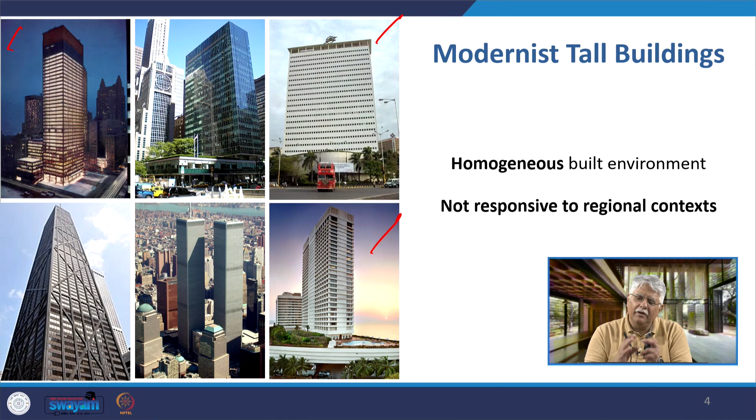The modernist tall building is a homogeneous built environment, not responsive to regional context. If we look at the Seagram building in New York, the Air India building by Johnson Burgee in Mumbai, or even the Trident Hotel, we find that they are just cuboidal masses varying from America to India only because we didn't use glass due to our climate - we used RCC while they used steel and glass.

But basically these buildings are very similar to each other and not responsive to regional contexts. So this picture really clarifies the issue. If you joined my earlier presentation on modern Indian architecture, you will recollect some of these slides, because I will be recapitulating India's paramount contribution to critical regionalism. So our focus in CR is more on India than any other country.

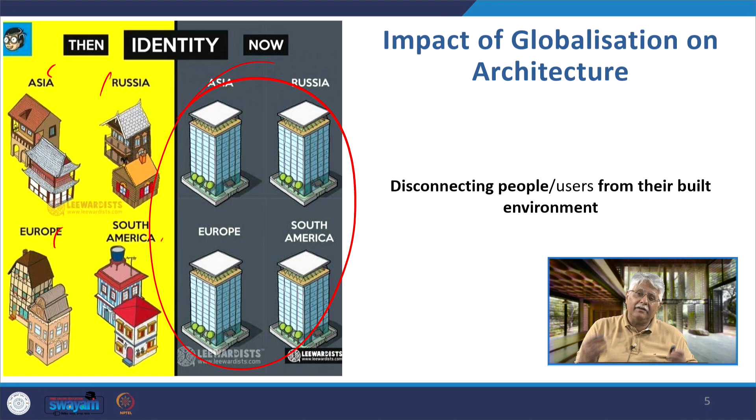Here in this slide, earlier when we talked about houses or buildings in Asia, Russia, Europe, South America, each one had a different flavor. But now that identity has been lost all over the world. We have created the same kind of buildings, disconnecting people and users from their local regional built environment.

So identical have cities become - the regional flavor, the regional taste is gone. In late modern tall buildings, not just modern tall buildings, they all speak the same language and continue the rootless global identity. In postmodernism, with all their playfulness, ornamentation and historical context, there is impulsive individualism - and this ornamentation of postmodernism also gets rejected.

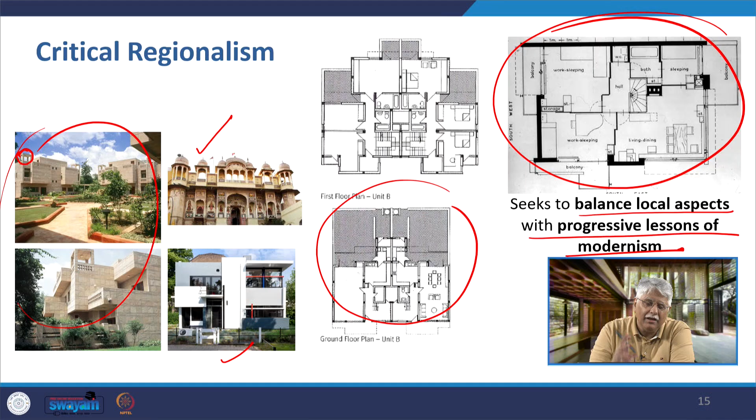So it is critical regionalism - taking a universal civilization and mediating that with the elements of a particular place. Its aim is to counter the homogeneity of modernist architecture, as you see here, this homogeneity in all these houses.

The reasons why India became the place with likely the most works of critical regionalism are its enormous climate and cultural diversity - from the Himalayas to deserts to coastal regions, and the variety of vernacular traditions across the regions of India, there are so many. Also, the post-colonial search for identity by architects like Charles Correa, B.V. Doshi, etc., who sought a modern identity for India, for the Indian ethos.

The resource constraints and climate necessity also played a role, because we needed to build passively, as we did not have enough resources, we were not economically strong, and our building technology was not that fine, so we needed to rely on making buildings climatically responsive. Passive design, local materials, and adaptive reuse were necessary for economic and climatic reasons, and the continued practice across generations also helped - generation after generation, architects have carried on the critical regionalism model, from masters like Charles Correa, B.V. Doshi onwards.

From Doshi and Raj Rewal to contemporary architects like Bijoy Jain, Sameep Padora, Sanjay Puri, Morphogenesis, etc.

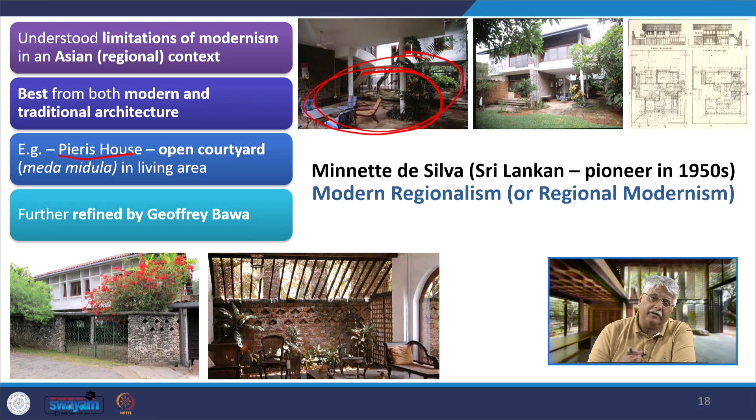Though Minnette de Silva coined the term modern regionalism or regional modernism, it was further refined by another Sri Lankan architect, Geoffrey Bawa. In his work we find tropical modernism, akin to regional modernism. Whether it was the parliament building he designed or other buildings, he brought in this concept of tropical modernism.

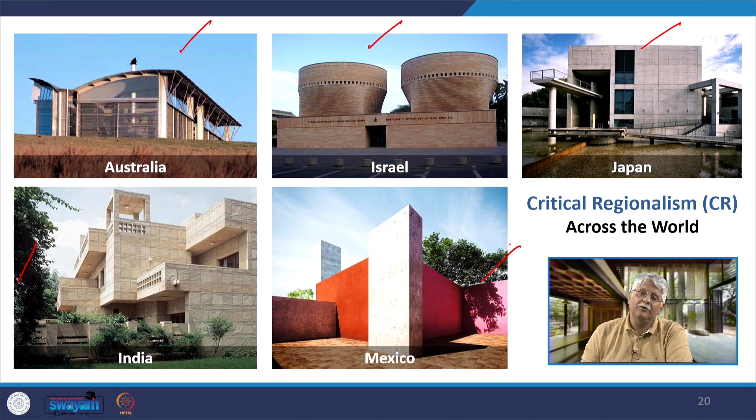Critical regionalism then spread all over the world, because everyone wants to follow what Kenneth Frampton said: to mediate the universal civilization with elements of that particular region. Thus we have Glenn Murcutt in Australia, architects in Israel, architects in Japan, architects like Raj Rewal in India, and architects like Luis Barragán in Mexico.

Critical regionalism or regional modernism, please bear with me for some time until I clarify this. Even before Indian architects were aware of this term, they were still subconsciously pursuing the idea in their building design.

For example, in the India International Center by Joseph Allen Stein, which I have studied in detail in my series Modern Indian Architecture, so I won't go there. But whether it was siting of buildings, light and shade, use of local materials, construction process, climate responsive features, or traditional elements used in a modern context, all this we find in IIC and in other buildings.

Not only them, we can go even further back. Similar ideas we see in the work of Edwin Lutyens, who gave us New Delhi along with Herbert Baker, and even Lutyens was conscious of orientation, shading and natural cooling. In fact, every architect of any bearing who came to India understood one thing: you cannot build against the climate, you have to build with the climate, and they did that.

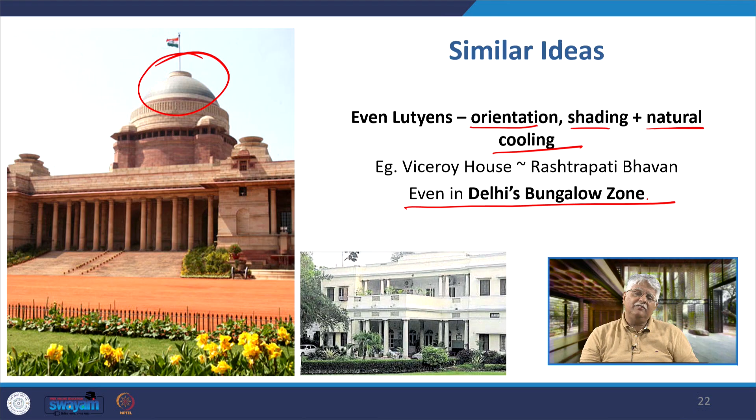So even if the building is colonial, it is still being modified to suit the climate of India, and other features have also been taken. For example, the Sanchi Stupa is clearly evident in the dome of the Rashtrapati Bhavan, and also in the use of climate responsive features in Delhi's bungalow zone.

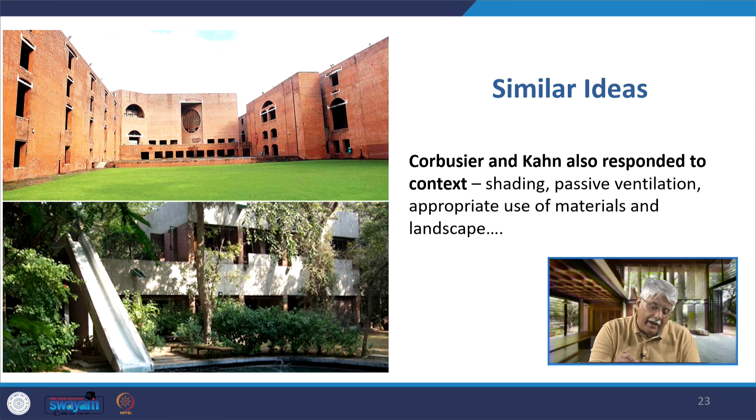Similar ideas we also find in the works of Corbusier and Kahn, who also responded to the context and brought in shading, passive ventilation, appropriate use of materials and landscape, whether in IIM Ahmedabad or the Sarabhai house in Ahmedabad.

But the generation that followed, or even worked with them, brought in a truly modern regional architectural language. These were architects like B.V. Doshi, Charles Correa, Rahul Mehrotra, Bimal Patel, etc. Thus critical regionalism took its roots in India, like in the Sangath by B.V. Doshi, or the new campus of IIM Ahmedabad by Bimal Patel.

Now, coming back to that point I said I would discuss: the difference between critical regionalism and regional modernism. They do overlap, there's no doubt about it, and often somebody might just say critical regional modernism. What is the difference? Critical regionalism is deeper, a more thoughtful evolution of regional modernism. CR doesn't just adapt to modernism, but questions it, rooting it in the place, the culture and the experience. So it is a much more thoughtful, much more worked out regionalism.

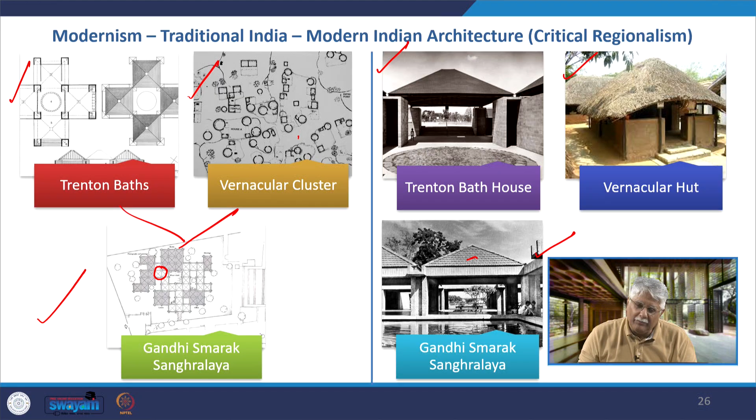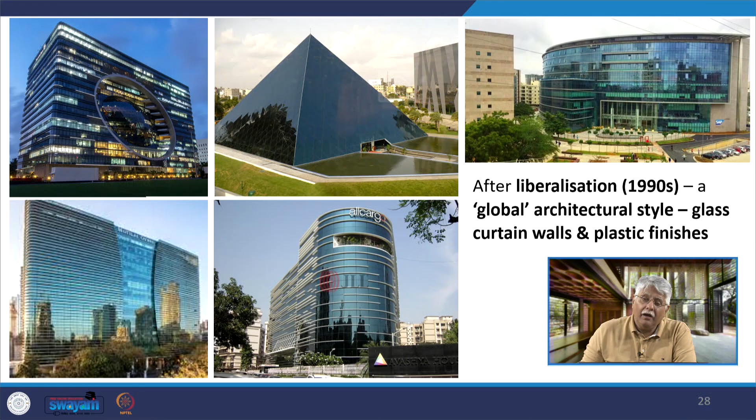The influence of critical regionalism varied with political, economic and social changes. For example, after India's liberalization in the 1990s, a global architectural style of glass curtain walls and plastic finishes became dominant. You see, when you look at Gurugram for example, you see all glass and steel in this fast evolving city, particularly after the 1990s.

But though this uniformity came in because of liberalization, because glass and steel came in abundantly in India, new technologies came in faster because our economy really leapfrogged forward, it did not take away the inclination of architects working under CR. These architects were even more greatly inclined to make critical regional buildings.

Reliance on technology to light and air condition our buildings and cars to reach them is the modern life. Very high energy consumption corresponding to very high carbon emissions, creating an unpleasant urban environment with great disparity between the haves and the have-nots. Therefore, the aim to be sophisticated and modern is actually being rejected by the West.

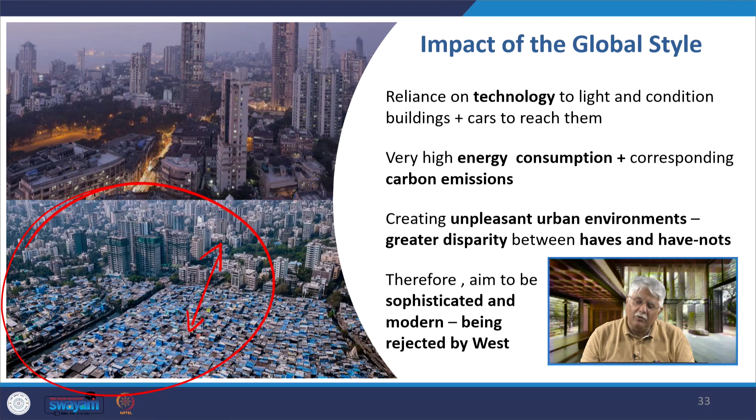This is what our city is. Look at this city, this is the picture of Mumbai, and look at the difference between the haves and the have-nots. Look at the disparity, or look at even today's cities with the high amount of pollution, the high amount of carbon emission. Thus the answer lies in critical regionalism, a different approach from the homogeneous or global architecture by relating architecture to the place.

How does it then deal with the problem of carbon emissions? I will come to that in a little while.

Let's look at a few other things like placelessness versus context. Placelessness of the modern architecture versus the context that arises because of critical regional architecture, a sense of place and meaning, sensitive to local climate and technological constraints of the local building industry in critical regionalism.

He has not simply made the Haveli again. He has taken the essence of the Haveli, the essence of the architecture, the Chhatris for example, and then brought that essence into this housing.

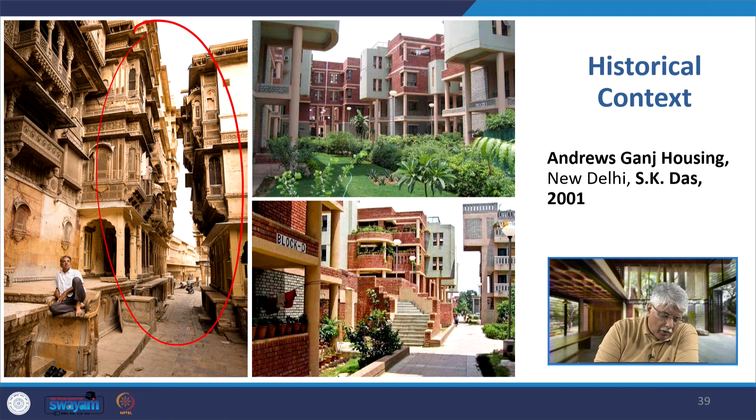The historical context you find in Andrews Ganj housing by S.K. Das, 2001, where, just as we find in our older traditional towns this kind of mutual shading impact over the streets because of cantilevers, we find the same approach taken in this housing.

Or even in this housing by Charles Correa, he takes this mutual shading effect of Jaisalmer and brings that into the Tara group housing in Delhi. So comes the dictum coined by Charles Correa, that is true for India: rather than the modernist 'form follows function', the dictum becomes 'form follows climate'.

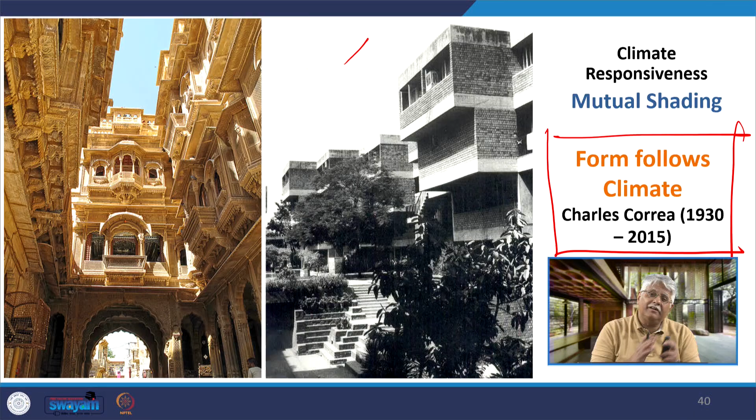The reason for climate responsive architecture today: earlier there was a problem of lack of technology, unaffordability of centrally conditioned buildings. We were constrained to design as per climate because we couldn't afford air conditioning.

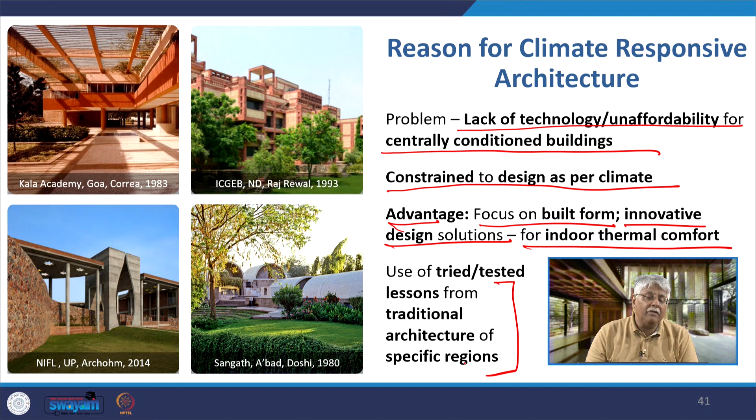The advantage was that architects were focused on the built form. They wanted to have innovative design solutions so as to provide indoor thermal comfort through passive means by using the climate in favor of the building. The use of tried and tested lessons from traditional or vernacular architecture of a region came into use at that time.

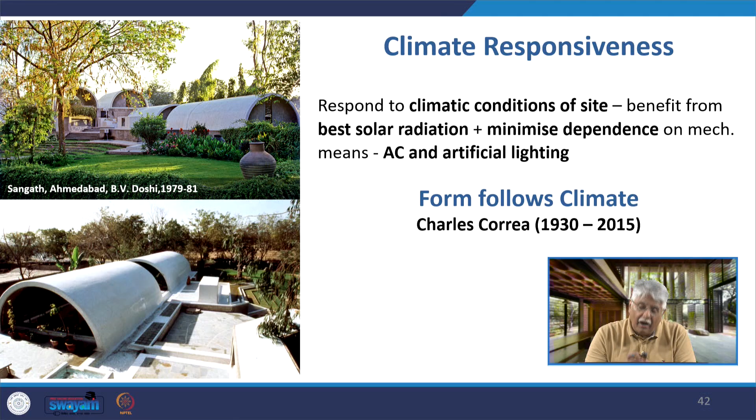Thus, we responded to the climatic conditions of the site, how to benefit from the solar radiation, how to minimize dependence on mechanical means like air conditioning and artificial lighting. In the Sangath building for example, the studios made by the architect have been sunk in, they are subterranean, and there are external walls which are one meter thick, hollowed out so that you can make storage niches from the inside.

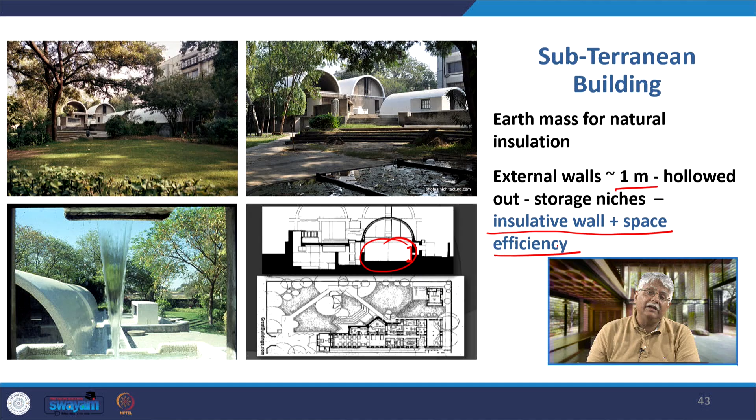They are not only insulative but also lead to space efficiency. Now, how to reduce the internal heat gain through the vaults: what they have done is taken these cylindrical terracotta tiles, cut them in half, and used the cylindrical tiles placed between two layers of ferrocement shells like this.

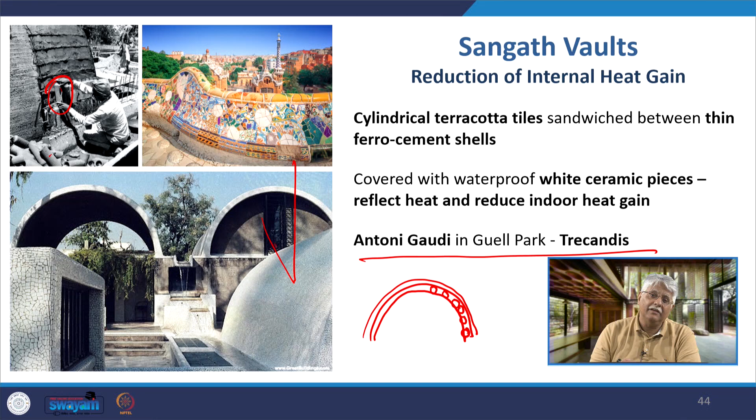They have put these cylindrical terracotta tiles like this, and covered them with white ceramic pieces or mosaic. As a result, this white ceramic tile reflects the heat back. Whatever solar radiation enters, because of the hollow terracotta tiles, an air gap is created, and that heat gain is also avoided, thus indoor thermal comfort increases and heat gain is much less. This whole idea of using mosaic tiles comes from Trecandis, the idea of Antoni Gaudi.

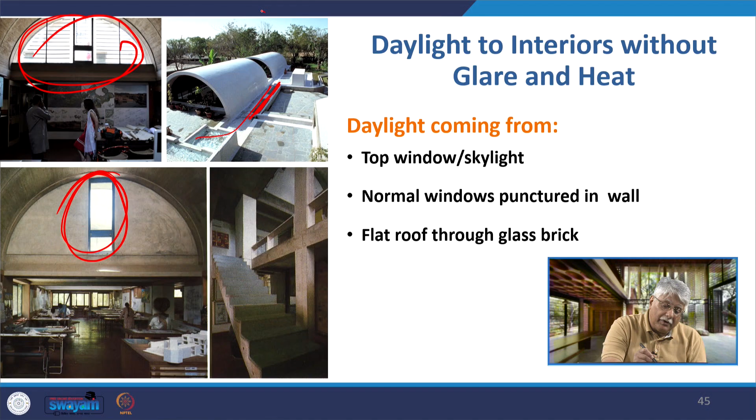Daylighting also comes inside the building to avoid artificial lighting. It comes from the top window, the skylight, and from the normal windows punched in the wall. And here you see these glass bricks over which water flows, but which also allow light to come down into the spaces below.

But the reason we want climate responsive architecture today is different. Earlier it was because we were economically weak, air conditioning was not an option, so we had to use passive strategies to cool our buildings and increase thermal comfort. But today, since the economy got liberalized post-1990s, we have the resources, we can condition our buildings, we have the materials, but there is a serious global problem of carbon emissions. 38% of global carbon emissions happen from buildings, out of which 28% is in operating the building.

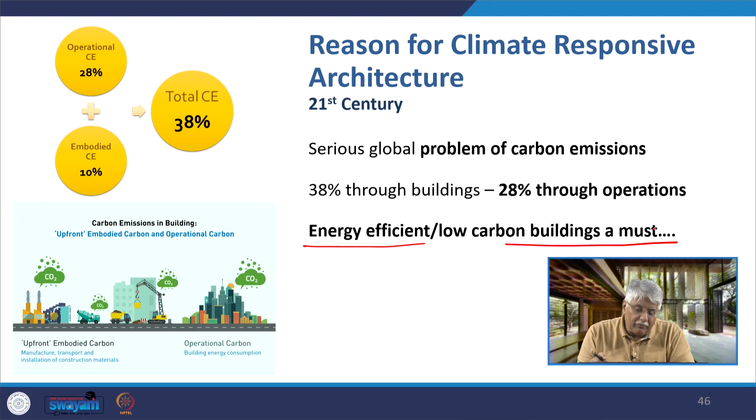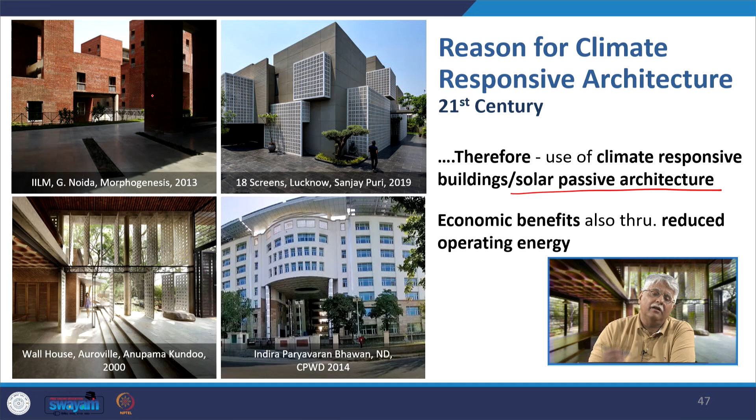Therefore it is very imperative to make energy efficient, low carbon buildings, and one way is to make our buildings in the same model as the past: climate responsive, passive, green, sustainable buildings. That we do when we use critical regionalism - that is one of the ways to do that. Climate responsive buildings and solar passive architecture are needed, and we also get economic benefits, because when we save operating energy, we save money. So in all these projects, critical regionalism is the way to go.

Now, the design of energy efficient and green buildings today can be highly engineered, hermetically sealed to achieve high energy efficiency with no impact from external climate. It is possible to design an energy efficient building this way, but the use of climate responsive solar passive techniques is also done by many architects, both earlier and today. The third method is a hybrid, where both advanced techniques and solar passive means are applied together.

So in the Cisco building in Bangalore, we see the first type: a very highly engineered, hermetically sealed, energy efficient building. The second type, critical regionalism, we see in the house by Shirish Beri. And the third type, a mix of the two with both technology and passive means, we find in the IGBC building by Karan Grover in Hyderabad.

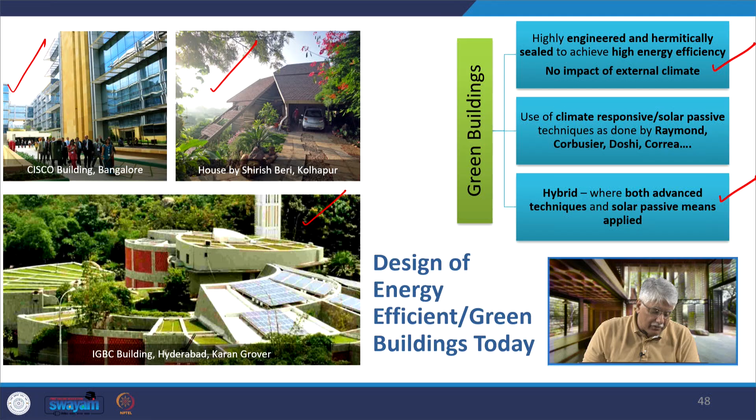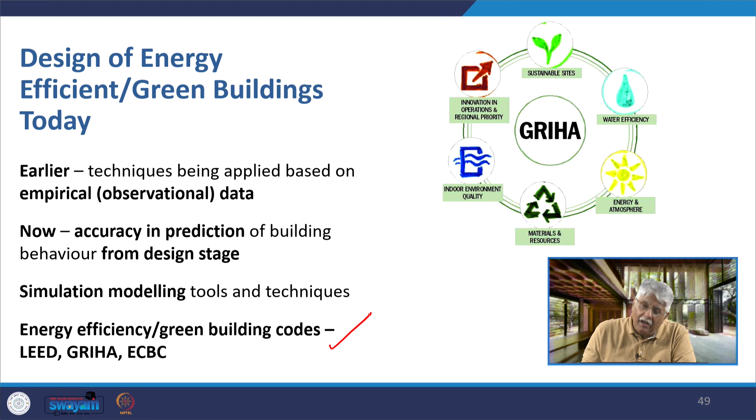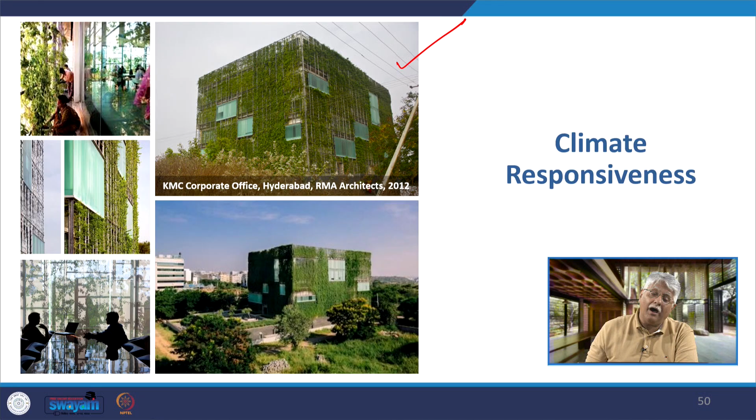Earlier techniques were applied based on empirical or observational data, but now we can design energy efficient buildings based on accurate prediction right from the design stage. We can simulate and model buildings using available tools and techniques to make them energy efficient, with reference to codes like GRIHA, LEED or ECBC. So today we can make a building like the KMC Corporate Office in Hyderabad by RMA Architects, Rahul Mehrotra Associates, climate responsive, which has a green wall, or we can use local materials in construction.

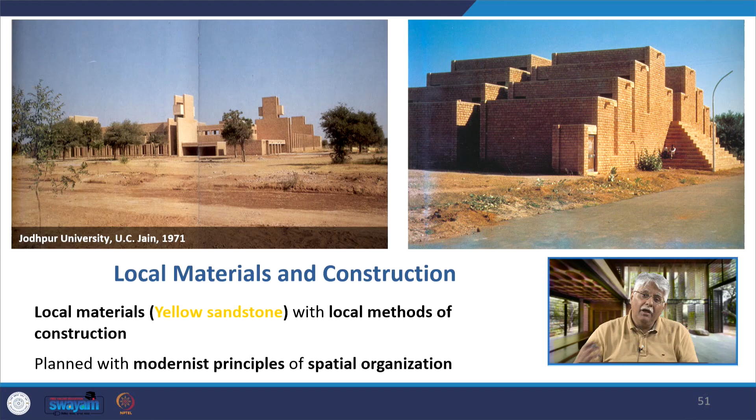I am taking you way back to the 1970s - this is a project by UC Jain for Jodhpur University using yellow sandstone with local methods of construction, where modernist principles have been used for spatial organization along with local materials like the stone beam here. Because they used the beam as it is, they could not increase the width of the corridor; it is controlled by the width of the available beam. So the structure and form follow the fundamental order of load bearing construction.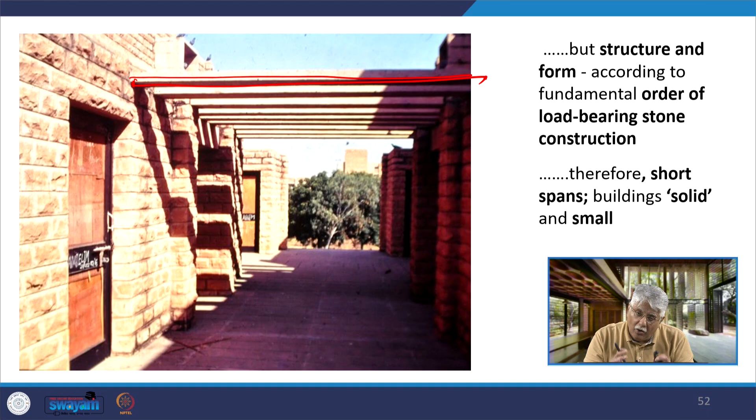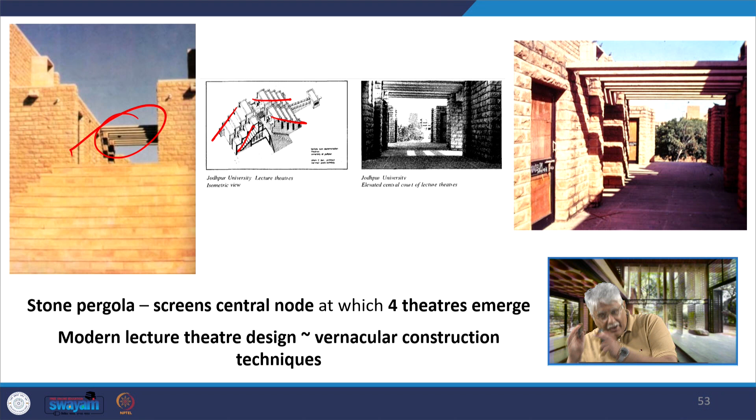So the spans are shorter, and the stone pergola screens the central node, but then it leads to these four lecture theatres, which are modern design theatres. Thus we have a vernacular construction technique combined with modern planning of lecture theatres.

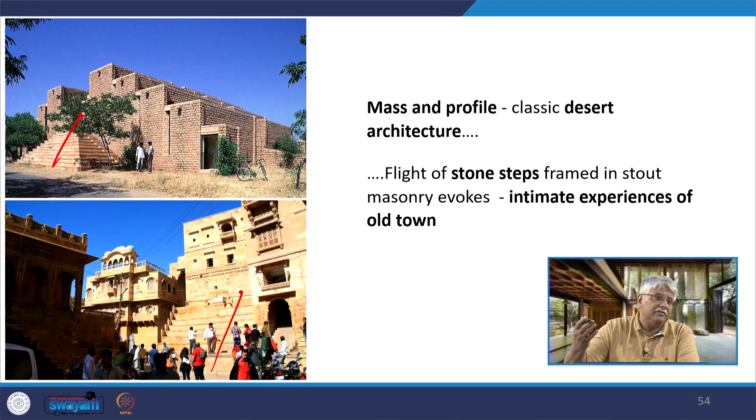The mass and profile is classic desert architecture. This flight of stone steps directly evokes the construction within the old city, and to counter the hot desert climate, he has provided double walls. In front of the fenestration is a small wall that prevents the sun from directly impacting the window, keeping it away and thus increasing indoor thermal comfort.

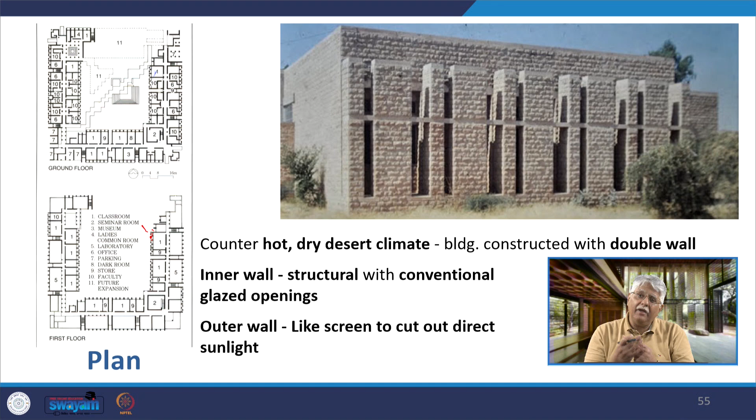Brise Soleil has been fantastically used by UC Jain, not attaching them to the building as Corbusier would do, but keeping them away from the building so that you get maximum shadow effect of the Brise Soleil on the building facade, adapting it for the hot and dry climate of Rajasthan.

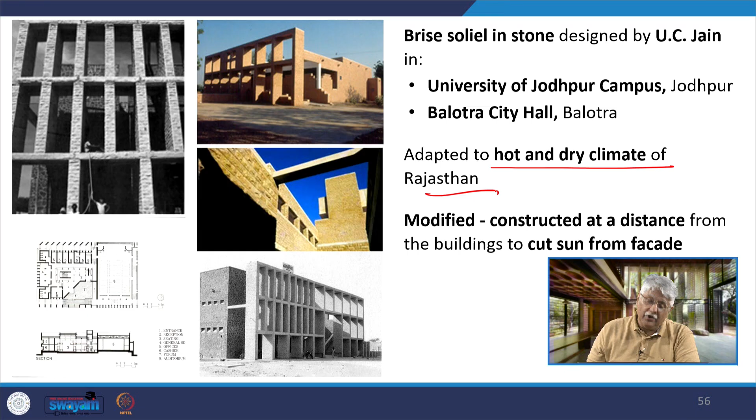Now, when we come to ecological sensitiveness, we talk about the minimum impact on ecology caused by a building, like the Bharat Bhavan in Bhopal by Charles Correa, who goes with the flow of the sloped landscape and builds the Bharat Bhavan accordingly, flowing towards the lake and creating a subterranean structure. The art center is designed as a sunken courtyard with a series of terraced gardens.

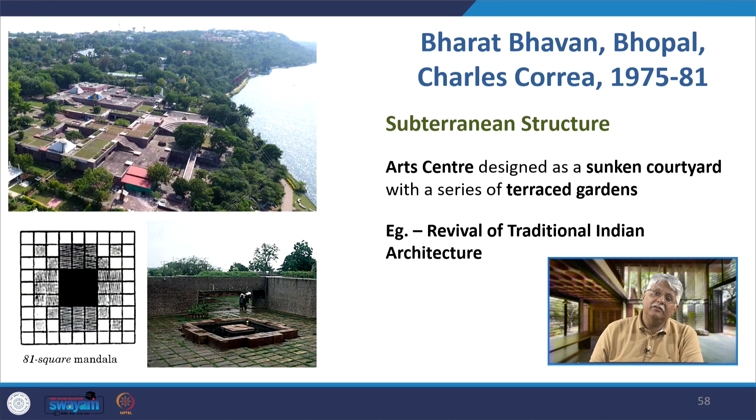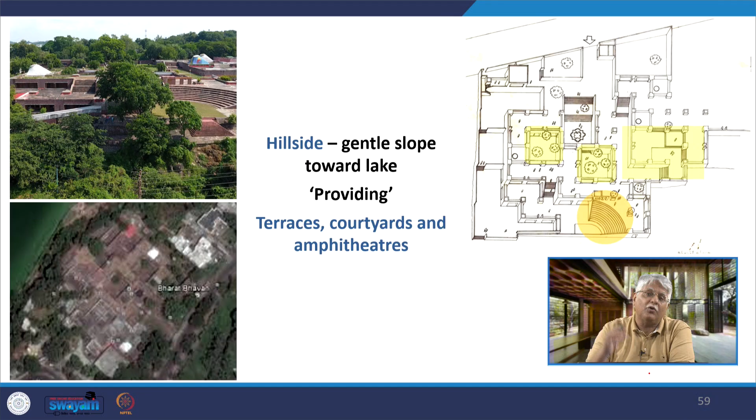This is a revival of traditional Indian architecture. The hillside gently slopes towards the lake and provides these terraces, courtyards and amphitheatres. There is lighting and ventilation within the building through these skylights, and these skylights are used by him in other buildings also, like in the Salvacao church in Mumbai.

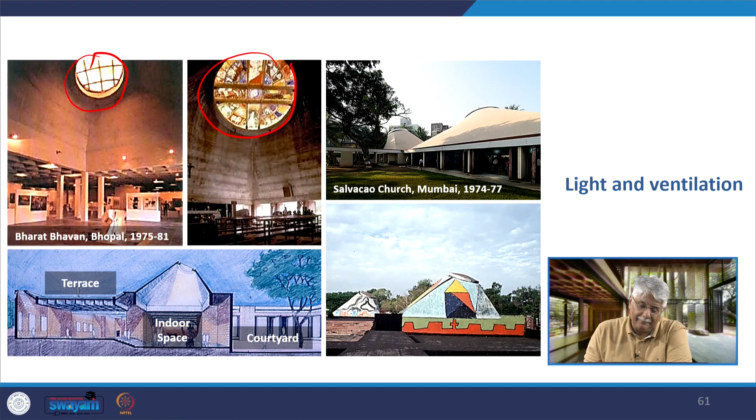We find that here in Bharat Bhavan he does it, and in the church, with tinted glass, bringing light deep inside. Then there is cultural appropriateness, another aspect of critical regionalism. The building responds to the way of life of the building users. This is the building in Jaipur, the Jawahar Kala Kendra, and in the Vidhan Bhavan, he revives traditional Indian architecture, synthesizing modern and historical principles, relying on the Vastu Purusha Mandala for the design.

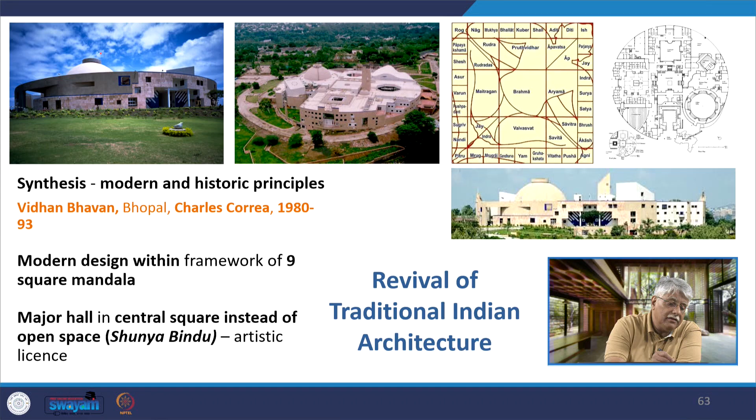For the Vidhan Bhavan, the major hall in the Central Square, instead of being an open space as it should be, the Shunya Bindu, he takes artistic license and actually makes it a hall, and the hall itself has the dome like that of the Sanchi Stupa.

Thus we find a similar license in the Jawahar Kala Kendra, which is again based on the Vastu Purusha Mandala, but here in the case of the mandala, he moves one square away in Jaipur, very similar to the plan of Jaipur. In Jaipur, the northeast square that was there was taken out and put on the southeast. But in this case, only the southeast square has been displaced, and that is it.

So here he not only does this, but he relates the plan of Jawahar Kala Kendra with the plan of the city of Jaipur, where the Kala Kendra is.

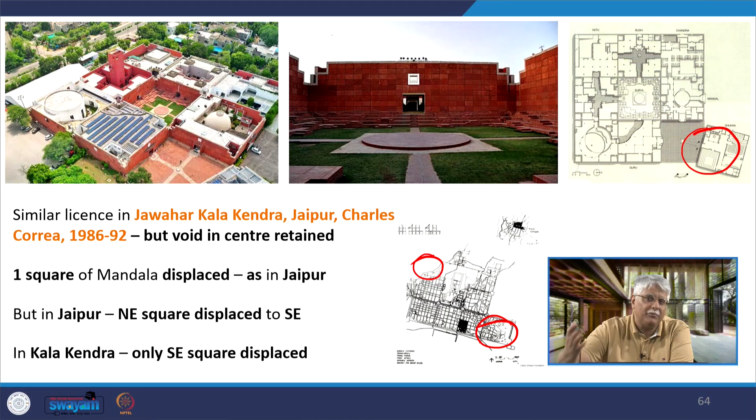Technological sustainability we find in many buildings, in the works of Raj Rewal, and in the works of Morphogenesis, to benefit the building programs.

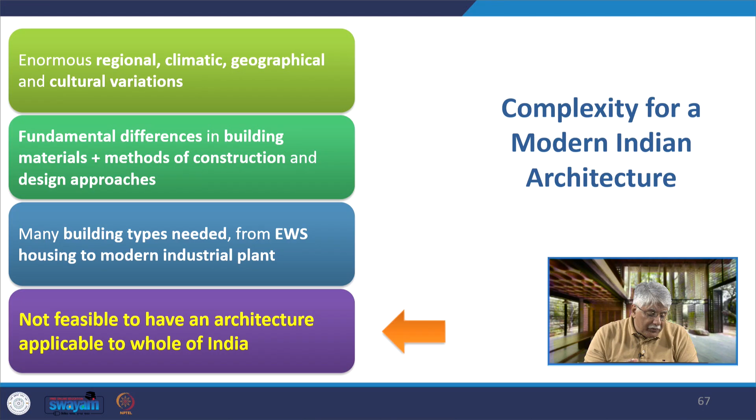Now, the complexity for a modern Indian architecture is immense. There is enormous regional, climatic and geographical, cultural variation, and fundamental differences in building materials and methods of construction and design approaches. Many building types are needed, from economically weaker section housing to modern industrial plants, and it is not feasible to have an architecture applicable for the whole of India, given the enormous regional, climatic, geographical and cultural variations throughout our nation.

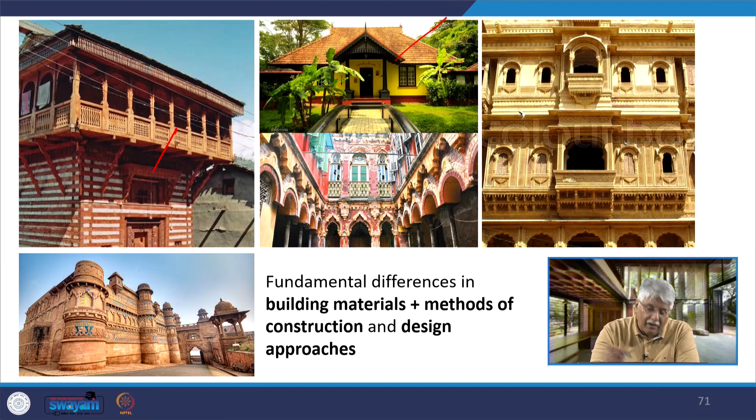Even just look at the regional geographical variations, from the mountains to the plains to the rivers to the desert all over our country. Look at the cultural variations, the variations in our food throughout our country. Look at the building material, method of construction and design approaches in Himachal, in Kerala, in Rajasthan, in West Bengal and other places. Or look at the tremendous types of buildings we need, from 5-star hotels to housing for the poor to hospitals.

Thus we have iconic works where materials, climate, and socio-cultural context merge with modernism. So another aspect comes in front of us, which is the neo-traditional style.

I will stop here and we will pick up from here in the next session, where I will begin by talking about the aspect of neo-traditional style and its relation with critical regionalism, its various aspects, and we will look at the works of other international architects along with Indian architects. I will again repeat, the reason why I began with India is because in all likelihood, maximum works of critical regionalism lie in India because of its amazing diversity. So we began with India, but I will take you to other global works in the next presentation when we will conclude critical regionalism. Thank you.